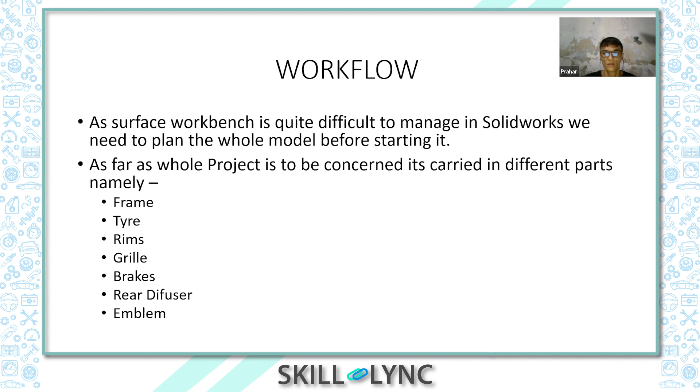When I created the model, I extracted the parts. First I extracted the windshields, then the doors, then the side view mirrors, then the rear diffuser, and with the help of that, the hood, and then the headlights.

For the starting point, I had to take reference from somewhere, so I imported the blueprints. For that, we need to set the proportions - the height, the length - so that our model is close to realistic. And as I mentioned, we need the projection curves.

For this side view and top view, we need to make curves from here and here. We need to make sure these 2 blueprints are relative to each other, so the final projected curve is correct to what we're seeing - proportionate between the left side and right side. If the blueprints are not correct, the output will not be as accurate as possible.

One short question, sir - were these blueprints prepared by you, or did you take them from somewhere? No, actually, it was provided in the course only.

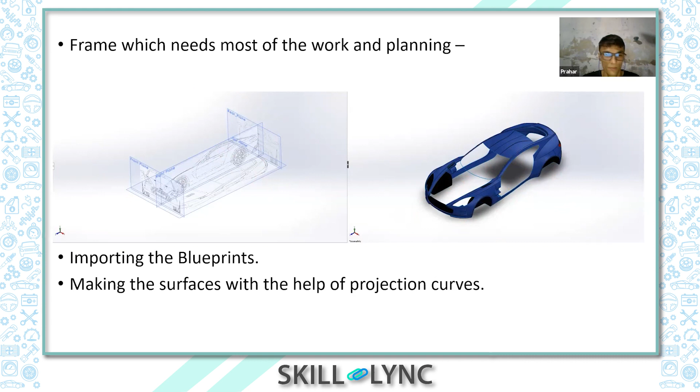From the side, you can see the final model where everything to be assembled afterward is extracted - the windshields, the doors, the hood, the rear diffusers, the headlamp, and of course the wheels. These are the parts I extracted and took into separate parts so I could make a detailed view.

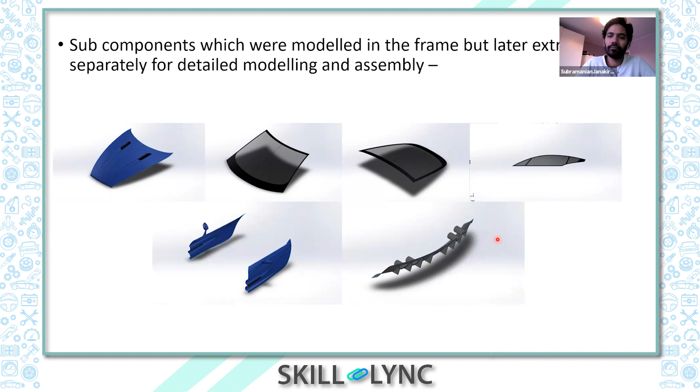For example, this extra feature here - I took this part outside and then modeled it. This is a combination of surface and solid modeling, and these are perfectly surface modeling only. The rear diffuser also uses solid and surface modeling, and for the rims I used basic features like extrude and revolve.

One really interesting feature I was impressed by is this variable chamfer that I did here. This was the best thing - I couldn't imagine this was even possible. This is again a combination of surface and solid modeling - I created the sweep here and created the surface there, and with the help of surface and body cut, I managed to do that. I consider this the top feature introduced in the course.

There are many such features - you'll come to know one by one. This was the best thing; it's really small, but the output is really fascinating.

These are the models. One thing I'd like to tell you is I pretty much messed up creating this door, because I wasn't familiar with the surface workbench. My mindset was, once you create the surface, quickly knit it. I created this door and then quickly knitted it, not knowing that this door would have to be extracted afterward.

This is where I got stuck, and I really needed to take help from the support engineer. That was quite a relief - this was a really messy part that could have gone wrong, but all my questions were answered by the support engineers. It was easy after he told me - it was pretty much simple.

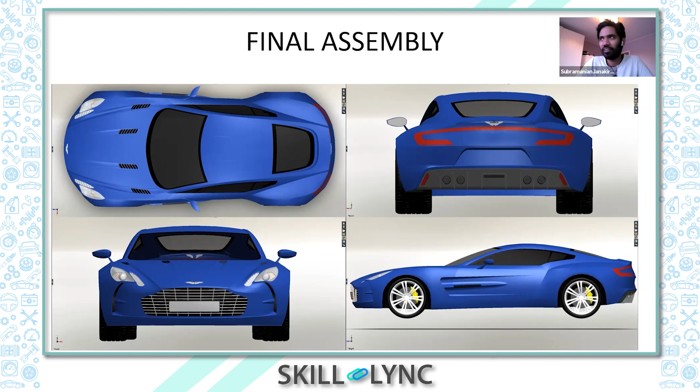I would like to show some rendering images that I made in Keyshot, which is also a really amazing software to showcase your work. The other important thing is, after you make your own work, you need to be able to showcase it, so the presentation is important.

One thing I did was import this file in Alias just to see how the curves and the quality of the surface work. I understand how the softwares work with each other, like importing the file and conversion of CAD, which was a really important thing in CAD design.

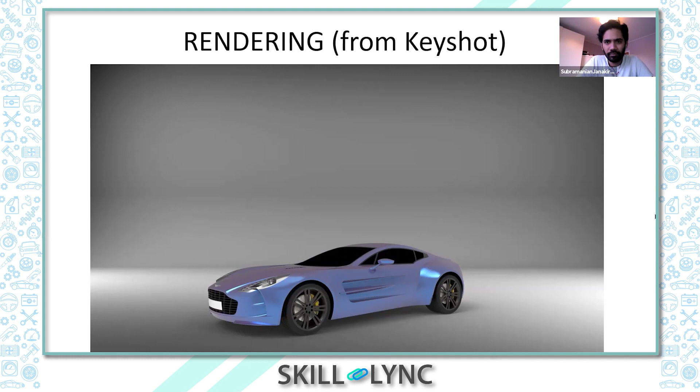These are the models, the rendering images, and a closer look at it, just to bring out the realism.

Nice, Prahar. Then what's the next plan? As you can see, if you focus on the bottom, I have not created the interior yet, so that is the main thing I need to make. Hopefully I would make it, but the main plan is to create this one model I have created, so that will be the first priority.

After I finish my hybrid electric vehicle course, I really want to make my own car so that I can drive it on the roads.

What else is pending for you to cover in this hybrid electric course? What have you completed till today? I have completed 2 courses. The first one is Alias, which is a really good course. I really admire Skill-Lync for introducing that course. The other thing is this Aston Martin one, and currently I am working in CATIA.

I took a design path in hybrid vehicle, and in the design part I preferred complete design of a passenger car, which includes automotive lighting, automotive surfacing using CATIA, sheet metal using NX, and Alias, and this Aston Martin course. Currently I'm in the third software, which is CATIA, and after that I will start with automotive lighting. They don't just explain my doubts, they actually solve my doubts by explaining how this thing started.

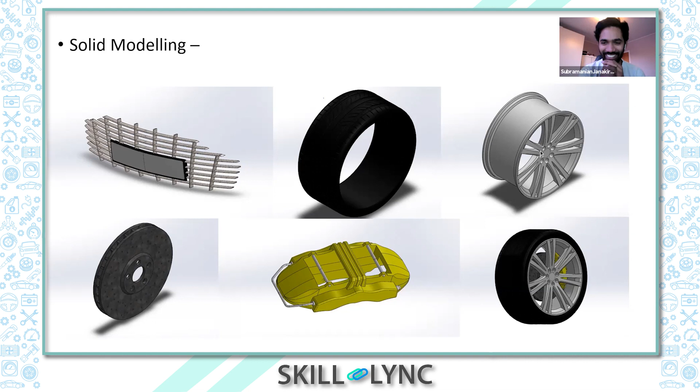But what I did was, while creating this revolve thing, I forgot to give one option, which was to merge body. So that was giving me trouble - this whole thing was not combining.

At that time, I just asked what the problem was. The support engineer could have directly said I hadn't selected this option, but instead of giving that answer directly, he explained everything - why we give this option, what exactly it does, and if we need to apply it, what conditions and consequences would result. This is how my doubt was solved, which is really rare and cannot be seen everywhere. This is how engineers should be, and this is how the mindset should be.

The other thing is this caliper as well - I learned the software on my own, which was the main drawback for me. I won't call it a drawback exactly, but it's the main thing that drags me down, because I learned the software on my own, so I am not familiar with every option that is in the software.

Here too, with merge and unmerge body - if I give this part to another engineer who has learned the software on his own, it would be a nightmare for him to figure out how to create this part. But if you use merge and unmerge body, this actually creates a clear possibility of how the part can be made.

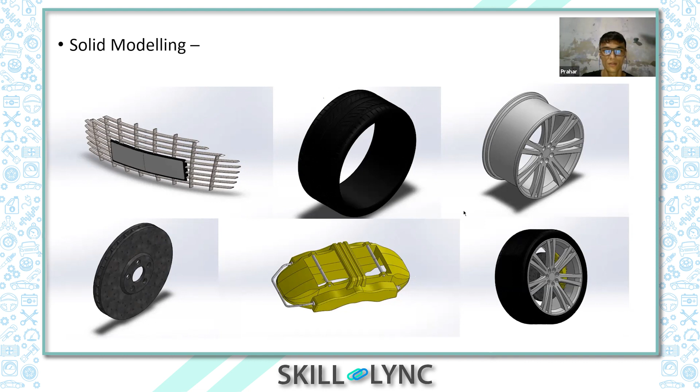Other thing, can I show you, like I made it in Creo? So this is the model that I made. Okay, it's not complete yet. That is what, like the straight line here. Looks promising, nothing to complain here, but of course there is a lot of scope to improve.

So this whole design I got from a water droplet, because that is the more aerodynamic shape which is possible. So I got the idea from that only. And apparently McLaren Speedtail also has the same idea behind it, the water droplet shape if we look from the top. So from that I knew I'm going in the right direction. I just need to make it possible to be realistic.

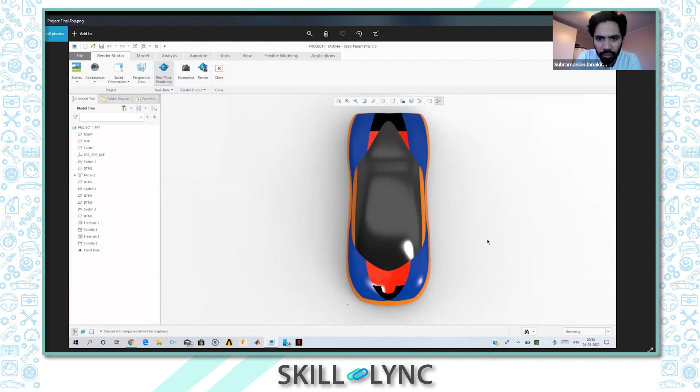But the model looks really promising. No doubt. Can you show me the side view, or kind of isometric view? Okay, nice. It's almost 60-65% complete, only 20-30% more. Nice, sir, very good.

Can you tell me, like, where are the parts, where should I focus more? Like, I designed this car to be a mid-engine one, so that is why I'm not having enough space in the front. So that was my idea to do it. This is mid-engine, which in the industry is considered a difficult place to have the engine. But that is what my plan was at that time.

So now from what I see, mid-engine is a way old type of mounting the car. The reason is, the engine actually dissipates quite some amount of heat. For people to get over the heat, they generally invest a lot of money on insulation, for noise and heat absorbance. When you do it in the middle, you will have to invest much more than what you generally do with the rear engine or front engine. And when you do this, you finally land up with very less space inside for the passenger to sit.

If we are talking about taking only 1 or 2 passengers inside this car, then maybe we can compromise on this. When we are trying to make this a 2-row car, then I would not prefer you proceeding with this mid-engine concept. If you are thinking about just one person to drive this car, then I'm really happy about this proposal, that would work, sufficient places are there.

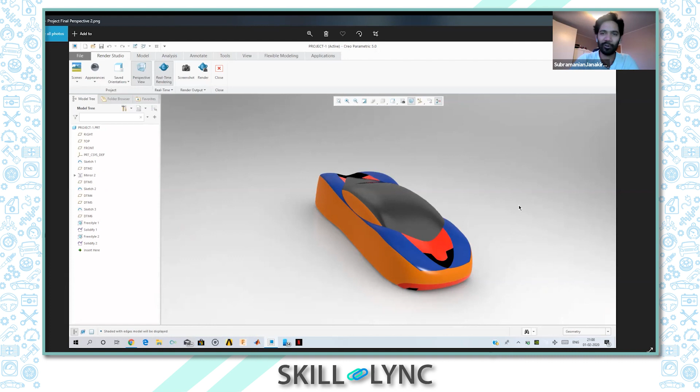So there is a lot more perspective. When it comes to racing cars and other things, the thinking and perspectives are in different directions. They have to see 0 to 100, how many seconds. They don't think about mileage or fuel efficiency. But for a passenger car, we have to think of fuel efficiency. So the thinking and perspectives are quite different. And again, the market is also bigger for passenger cars than race cars. Yeah, so I'm also interested in that.

Great. One more thing I'd like to share, since you said you're more interested in passenger cars. This model I made in 2016-17. But the real change happened after I took this course. I didn't have any idea how to proceed further, so that is why I stopped here.

Okay, as I said earlier, I've picked passenger car design. Now you can see where I'm going, right? This is where my mind is shifting - I should focus on passenger cars more. That's the reason I took the passenger car ones, because as you said, it's a bigger market, and it's more convenient for me, and for family members too, since it makes you happy to see your own car on the road. If you design a sports car, it's very rare to see on the roads. But if a passenger car is going and you designed it, you can say that's my design.

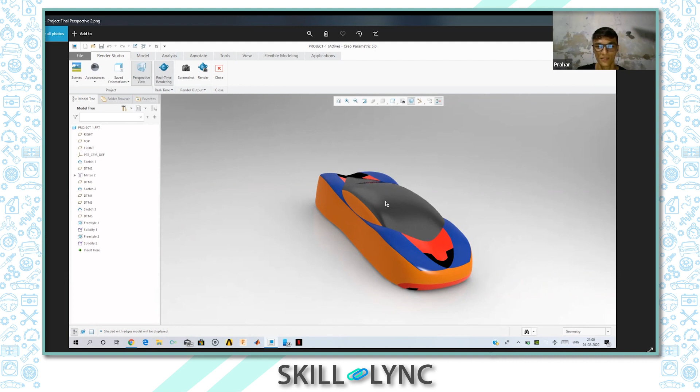So yes, of course, both have their own perspective and their own level of reach. But I prefer passenger cars. This is just my own impression, sir, nothing offensive. No, I'm thinking the same way, that's why I shared this. So I'm also focusing on passenger cars, and let's see if I can make this passenger friendly, just like you said. I'll have to make this from scratch in Alias, so that's also a difficult thing to do.

Proceed, good job - that's what I could definitely say. Like I told before, I always wanted you to keep doing this good work. Keep in mind what we discussed today - think of other properties, other materials, other items, what you've got to do. The exterior appearance is different, and how it looks inside is going to be completely different. You'll have to keep that in mind for sure. So it gives you wider knowledge. I can definitely guarantee you'll have much better knowledge and a much better perspective over passenger cars later. That I can guarantee.

And any difficulties, don't forget to contact us. No, great, definitely. And that is what I'm seeking, and that's kept me going. So this is the best thing.

I'm not doing any job right now, but at least I can say I'm working with my dad at the moment. So you completed your engineering, right? Yeah, I completed in 2019 only. So I worked for 6 months in manufacturing industry, which I'm not a big fan of. I don't like manufacturing industries - people are working like robots, they're giving outputs, and you need to give. They give you input, you give the outputs, that's the only thing. Every day you don't think there's going to be something new.